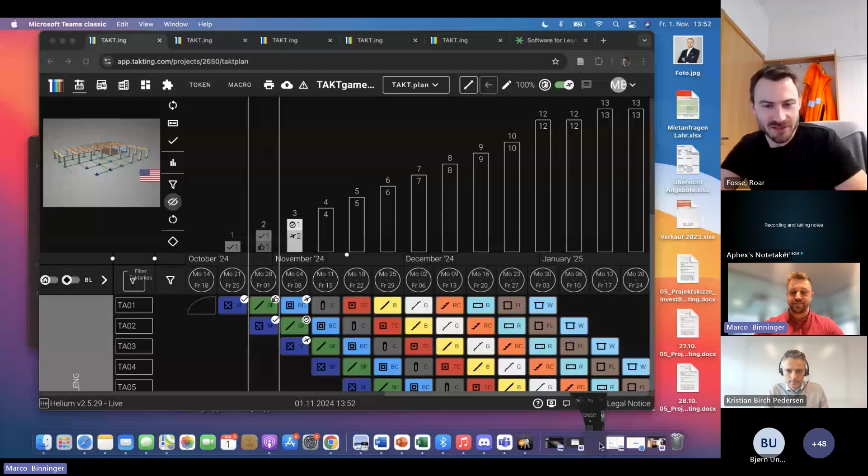Let me start with a few slides like all the others, and let me continue with the software in the end.

As you already said, Takt is in our name, so our company is called Takting. Ing is nothing else than the German word for engineering. In Germany, we write it with an I at the beginning, so we are Takt engineers.

Where we come from, this is the core team, and don't forget Janos, but he was not there when we did the picture. What you see already on the table in front is our simulation game. So we are not only a software company, we are a company who is there to enable you to use Takt in your projects, and especially not only in your projects, in your whole company.

So we are not consultants, just to make that clear. We have a partner network with a lot of consultants, which we guide and which we help, and which do the job on site for us.

But we have a simulation game. Here you see the industrial hall. We have it for interior, we have it for high-rise buildings, and we have the software, which is in the focus today.

So where we come from, we have chaotic construction sites. I think all the others are also tackling that problem. Things are happening in room and time. You can use different things like a line of balance, or we have seen it before.

You can use a Gantt chart to structure that thing, and you can also use Takt planning for that. What's special there? The grid is defining your construction site, and the process should and has to fit into that. So a lot of people are talking about Takt and have totally different Takt times on the construction site. That's okay if you have it on the construction site, but it's not possible to have different Takt times on one conveyor belt. This is our understanding.

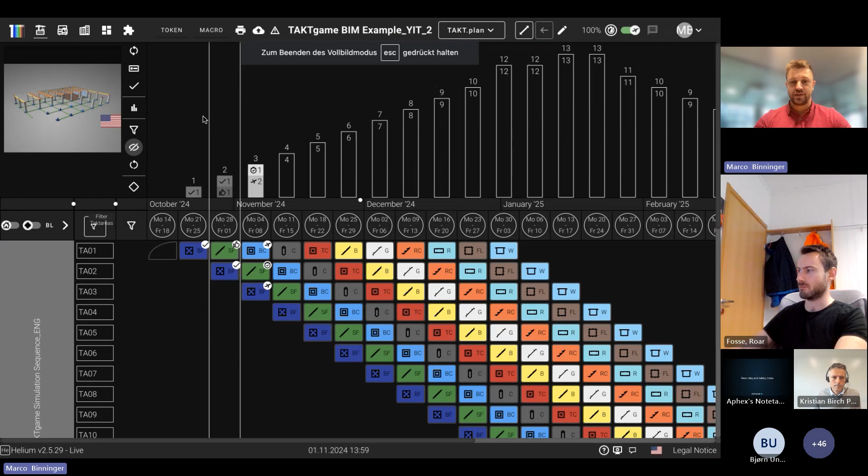See here, you can put bars behind. We highly recommend not to do that, because it's crazy difficult to match long bars with short bars and standardized bars. You will mess it up because you compare apples with bananas. So we recommend go for a takt schedule, use it as a hardliner. You will have much more benefit in the future.

So what you see here is the schedule. You see the different flows. If I open one work package, you see also what's behind there. So you see, and now we come to the key of our software, there's a little bit of data behind. So you see, for example, manpower, which I have planned. I haven't recorded what's on site. You see here, and this is a really easy example, there's just like one work step behind every work package.

So you see the work package, the work steps. You see what's necessary to do control. You see what's necessary to do design, and what's necessary to do logistics, and a few more, yeah, book cranes, whatever, machines on that, handle the material on that.

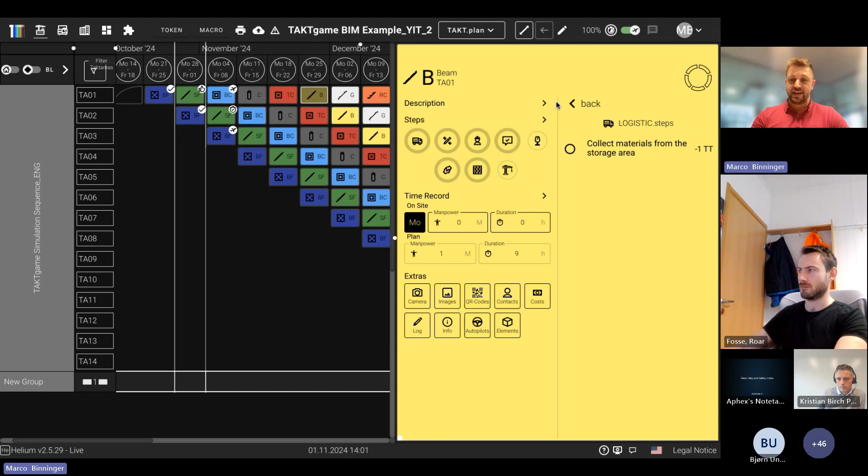And we work with different statuses here. We have ready, which means you can start with that. Subcontractors, I have defined it as a GC. The planning is ready, whatever is ready, location is free, go into it. You have started means everything is ready, you have already people on site. Maybe the subcontractor is even putting that status inside of done.

So we have a rights and role system in the background, and it's easy to define which kind of rights you give to which kind of rule or role. So 'done' means I'm finished as a subcontractor, so please, site manager, come out and give me a check for that. And for sure, if you have a problem, you can even put a problem behind and say, look, material not delivered — you can put a roadblock behind.

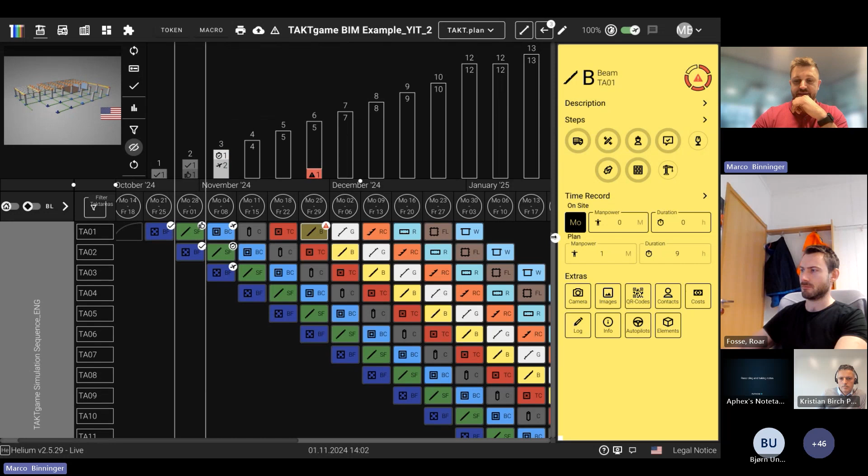What I would do, or most of the clients are doing, is look on a daily basis in the schedule to see what's the current situation of the project. So currently we are in that week, focusing on the roadblocks, handling them, putting them away from the system in the way that they say, like material.

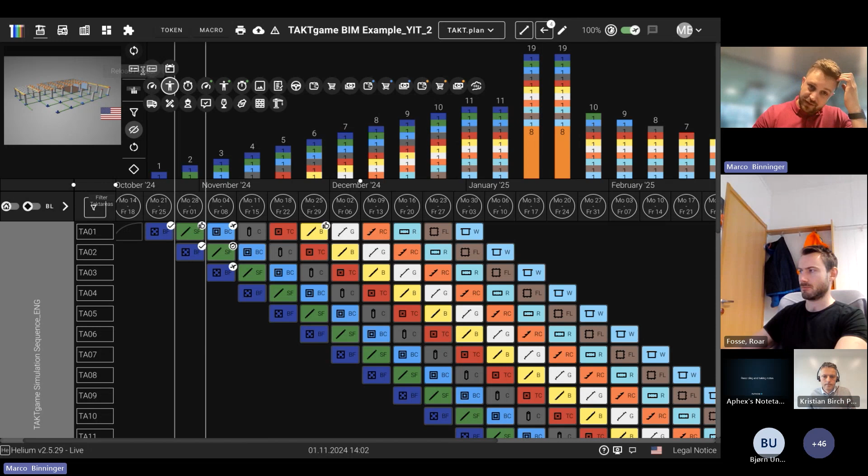Just a simple thing, I would write it in practice a little bit more in detail. So things are getting back to the original status, meaning it was already checked, so you have a full overview. For sure, you can filter it for manpower, for effort, for logistics step, pictures you have uploaded, everything which is behind. And you can also work with detailed milestones.

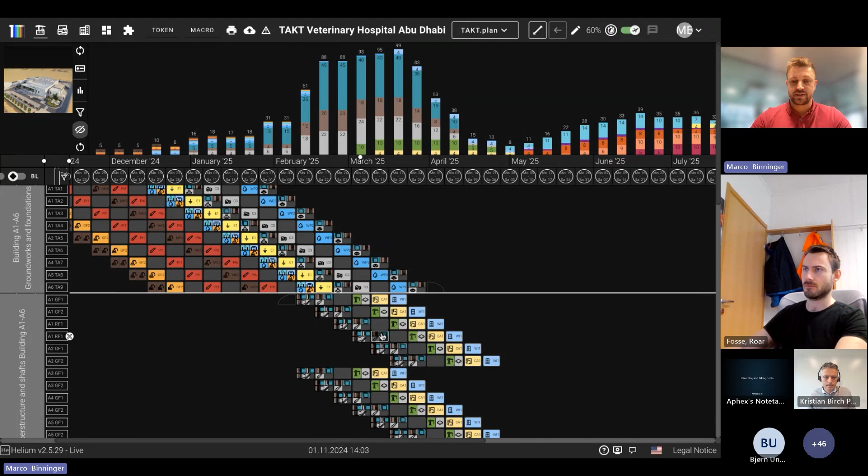Let me give you a real life example. This is one project from Abu Dhabi, so we are also acting and having clients worldwide. You see here clearly the planned manpower which is behind. We have different conveyor belts running on the construction site, but we try to give them all the same speed to combine the data. You can easily filter it, what kind of effort is behind, how many minutes and hours are behind. So here we're talking about not a really simple project.

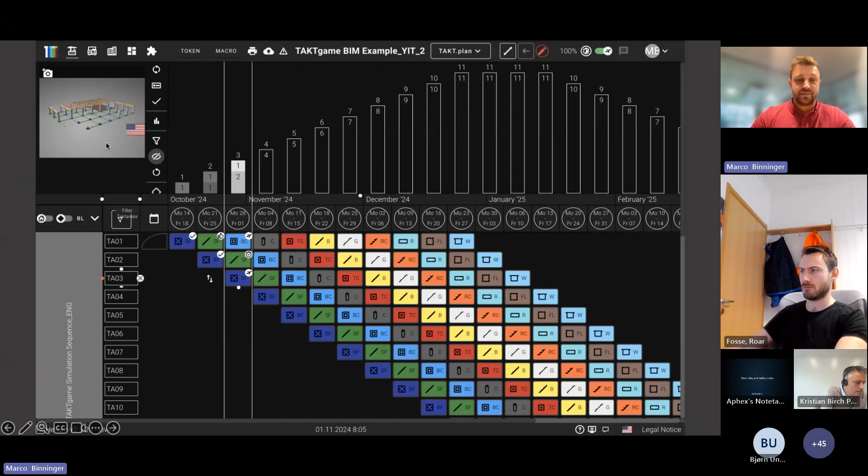And if you go more detailed into the things which we are doing, we also have... let me jump back to my previous view. So we have different kinds of views on that schedule. Work package I showed you already, you can put all the data there.

So we are coming from scalability. Scalability means nothing else than scaling it within your project. Define one data set, one sequence, and scale it over your project. Define one data sequence in your project and scale it over your company.

For sure, it's easy and nice to see a 4D simulation, but it doesn't give so much value in my opinion. The real value comes from having all the data inside our takt schedule. So if I open one work package, you see exactly how many square meters, how many cubic meters, how many tons, whatever I have to do in that stage. You can combine it with your crane capacity and see, is the crane even able to lift that thing? If you combine it with your material data, you can do CO2 calculation.

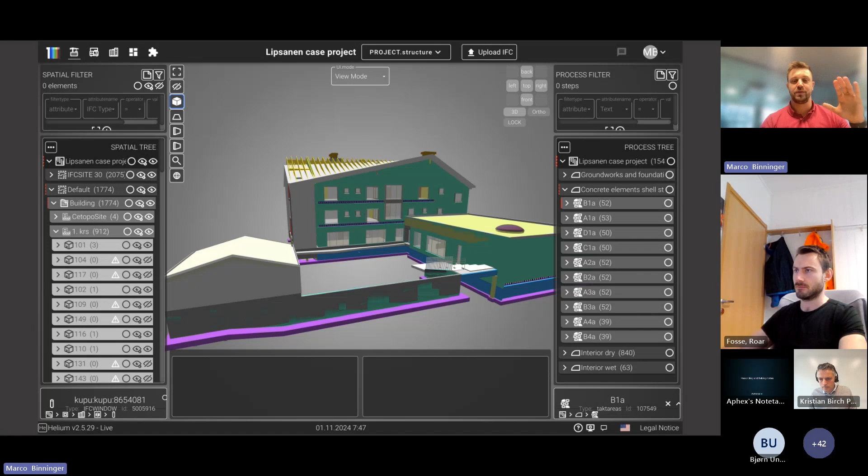So if you really have the product, meaning the BIM model, under control, and you have the process under control, and you connect this in the right way, you have the full power of your production system. And this is how we call it here: the production planning starts and the scheduling ends.

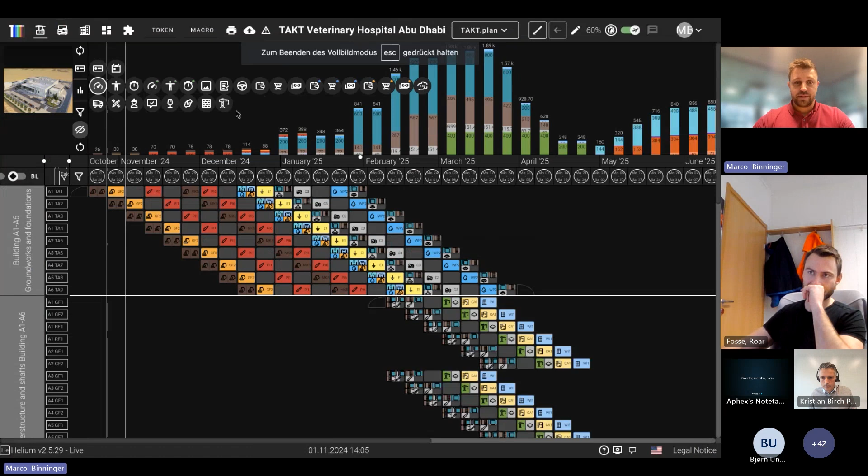Let me jump back to the software. So this is a live project. Let me show you another example. This is the 3D integration. So what I showed you is the structure of the model.

Here they already modeled it in that way that they have takt areas behind, but this is not necessary, so you just link that. Here you have the process structure, which is nothing else than the structure of the takt plan, which you see here, for example. You see nothing else in the takt section. This is already a live running project, so I tried to not change anything here.

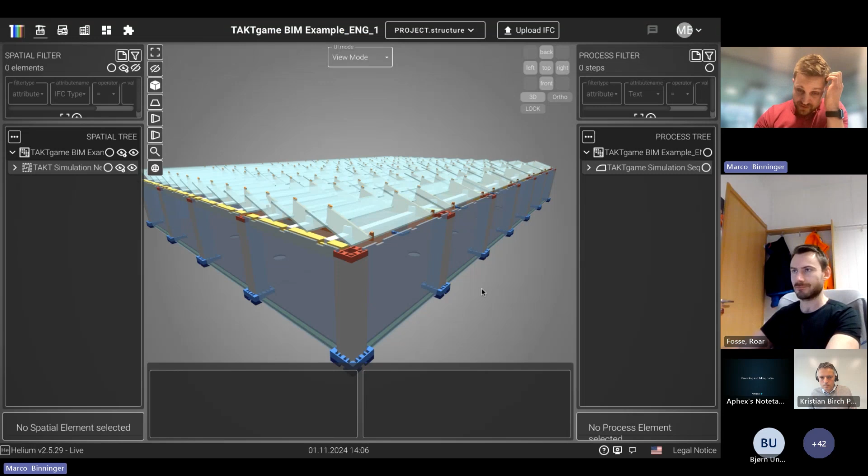And that's why I would like to use that model. So this is the simulation game which you have seen before. What you can do with that simulation game is we are training takt planning and takt control based on the simulation game that we play together with 12 different subcontractors. We can train you as a team.

And for sure, you can also train how you can handle the digital world behind. You can integrate it in your training. So there's nothing else than 4D simulation. You can plug it in and switch it off.

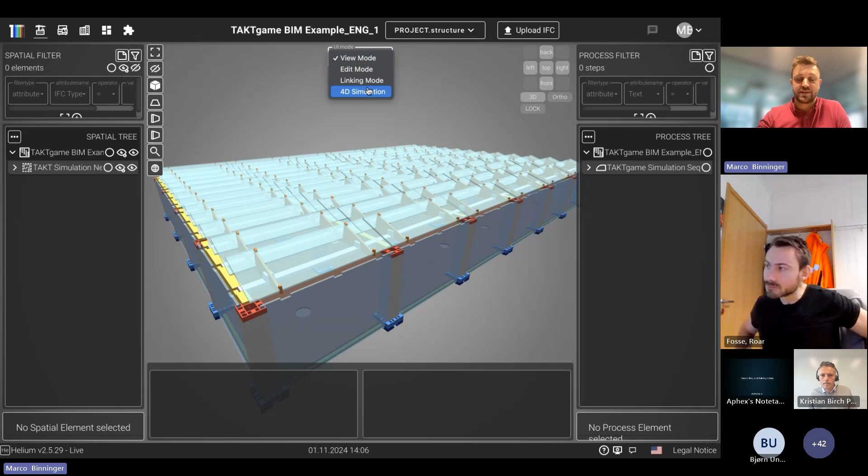For example, this one is already linked with the schedule. This is a little bit of work with filtering different things together, but a good project, a big project, can be done in 1 to 4 hours. You can link your project easily if you're a little bit used to working with your process and the product together.

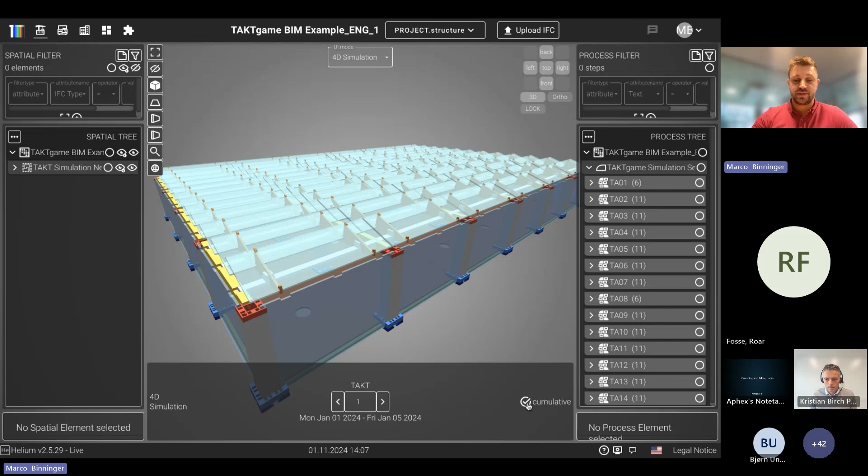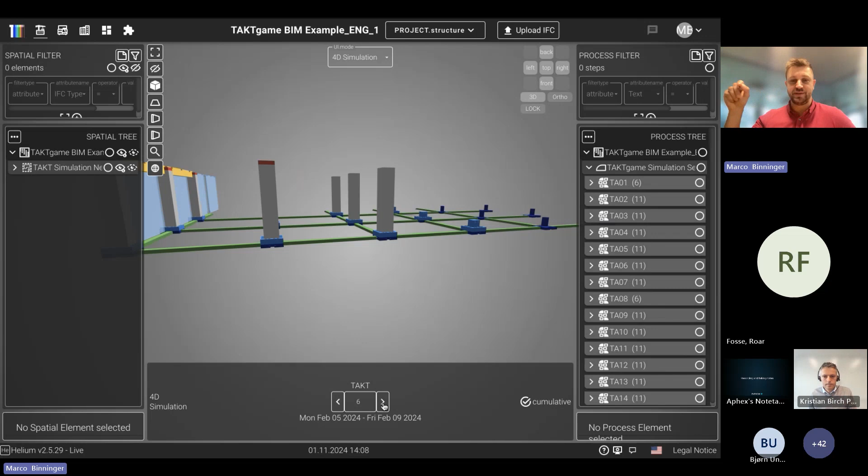And for sure the output, if you bring together your model and your product with the process, is that you know exactly which kind of parts, which kind of elements on your model, will happen at which takt time. Then you just have an interlink and you can use the model to visualize different things. This is for sure an easy model - yeah, real world is a little bit more complex.

And if I go back to the takt schedule and open one beam, here you see again, look, we have to install one beam. You see already in my takt schedule, because I combined it with the model, there are 2 elements. In real life it could be 5 tons or 500 cubic meters of concrete or whatever. We even have a performance factor because we can do the calculation in the background. And you click, for example, here, and you see exactly which element is linked, where it is, what is linked, and you can show and visualize the element within the model where it's really placed.

Here we are talking about these 2 elements. Yeah? 2 minutes. Yeah, thank you.

You can put images behind, do the whole control, put images behind. You have a log list where you can say, okay, what has happened within which project, who has created which step, who has linked which step, who has activated which thing. And yeah, this is how we do control, more or less.

So there's much more to see, I don't want to show you the things in detail. Everything is working based on drag and drop, like all the other software too, I think. So put an empty wagon behind, and for sure it's asking you here or everywhere. So it's easy to use software, especially with version 3.0.